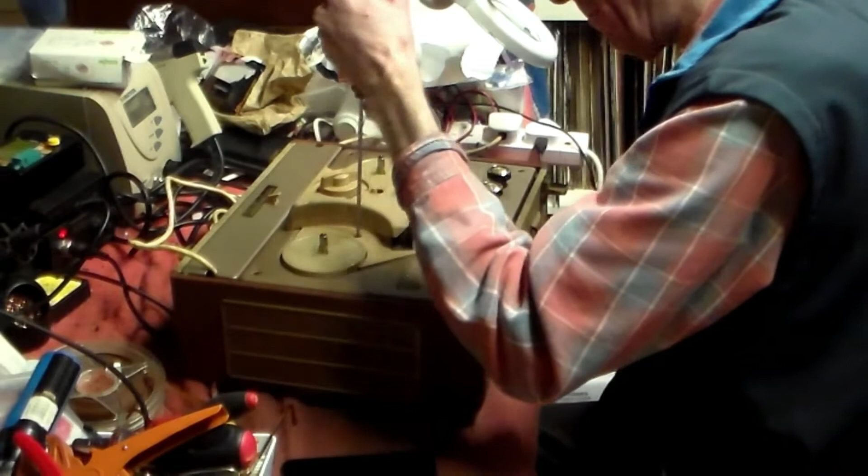You have to think very much about how to balance it. By balancing it, we mean the take-up reel and the supply reel have to be balanced correctly, and the reason why it doesn't rewind at all is because it's out of balance. That might affect the play as well, we don't know, but that does happen with these, so that's the first thing we look at.

So at some point this should come off. Very soon it should come off. Just help it on its way, as it were. We'll have a look under here.

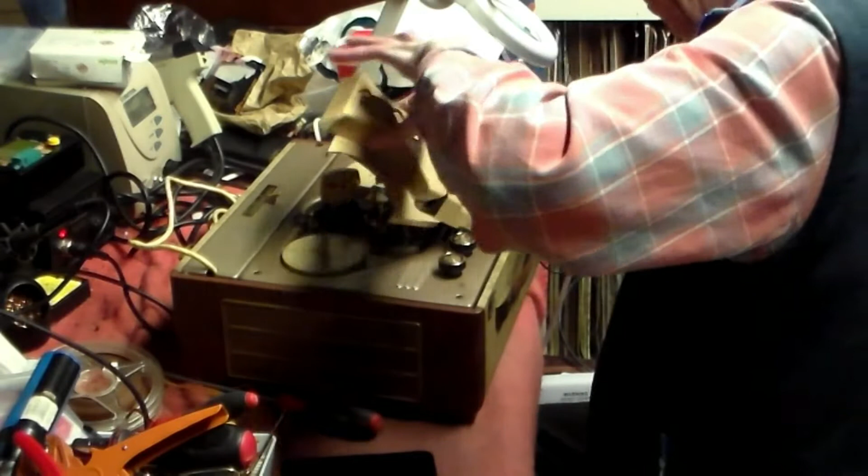Now the fact that it winds both ways straight away suggests to me that both the belts are okay on this deck, which is good to know, because on these decks they can be rather difficult to change. One is easy to change, one most certainly is not, and guess which one tends to fail?

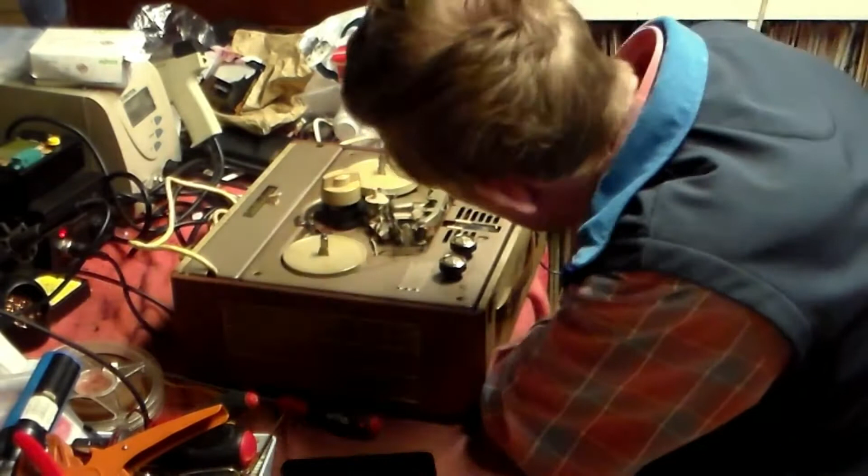Exactly that one. So on here we've got the eraser, the playback recorder, that's the playback thing there, and the capstan is there, and where's the capstan? Capstan, where's the capstan? There's no capstan on this thing.

Well, straight away I found a problem, because of course it should have a capstan wheel, which it's not. So we've got that to look up and find one for it. And also, by the way, that proves that the HT is there, and that proves that the amplifier works.

So before we go any further, I know what, oh, it's there, the capstan, right, so that should go forward, and it should, which is not done, so there's something with the mechanism here which we need to sort. Yeah, that's the capstan there. It's dirty but feels reasonably okay.

So the first thing we do is get the deck working, and then inside we go to look more closely at the electronics. So on we go, as it were, to see what is not doing what it should.

With these, by the way, the ST451, they have some interesting features such as the mic input as well, which goes out to the speaker, which I'll show you later on. This, by the way, was found in a lady's passage. It's actually leaving this out for dustman, surprisingly, but Chris brought it here, and me being me, we want to get this thing working, which is what we're going to do.

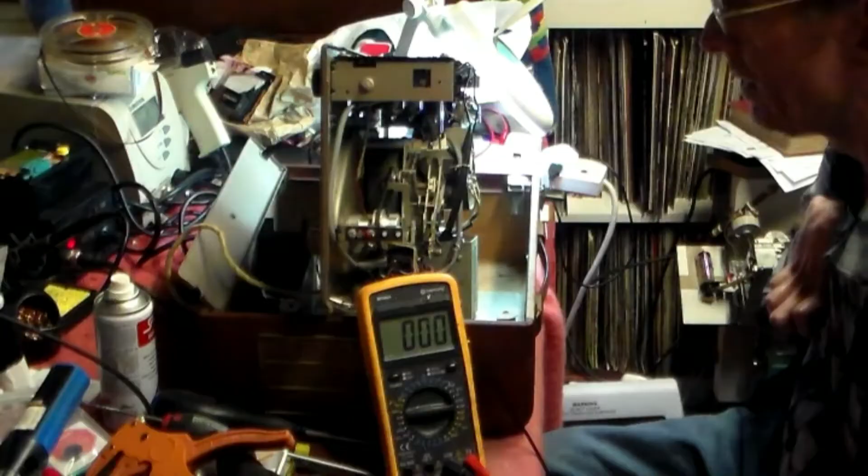Right, well, with this machine fully apart here, as you can see, one or two things come to light. First of all, this belt on the rewind is its total mechanism to get it going, as you can see if I set it going like that. Got an amount of torque, but it's not actually doing enough to rewind the tape when the tape is played.

So I'm going to change that belt. It's got to be a belt that's big enough to get onto this wheel here, because it picks up from there and goes to there. So that belt has to be a big one. I'll look online and see if I can find one that'll do it. If not, well, I'll have to find another way of doing it.

I noticed there is more play on this, so a smaller belt might be alright. I'll check and see on that by looking on another machine I've got where I did change the belts 3 or 4 years ago.

Also, by the way, with any machine like this, the other thing you need to be sure of, very sure of, is certain capacitors, grid caps in particular. Now, if it's switched on, wait for it to warm up. First of all, the EL3527, by the way, on this, the two stages are used in separate circuits.

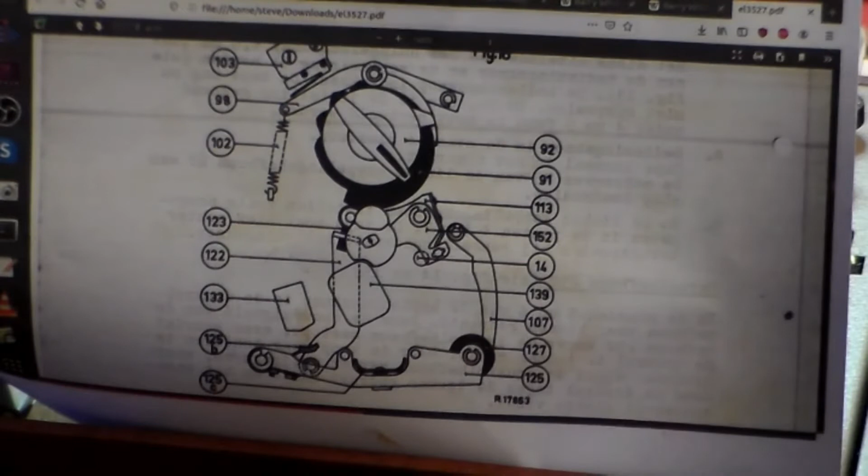Looking around YouTube, by the way, I found out that this deck is not really covered at all. So what I'll do - there's a fault here on this deck which I'm going to fix, but before I do, I thought I'd go through and show you what the fault was on this thing.

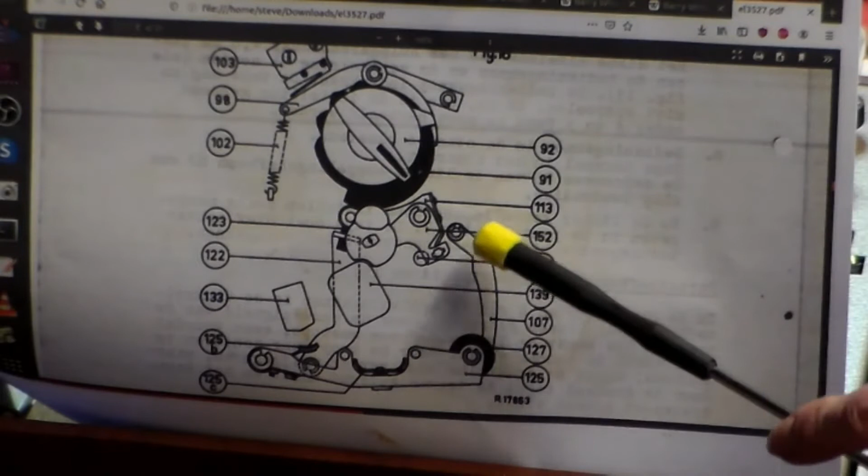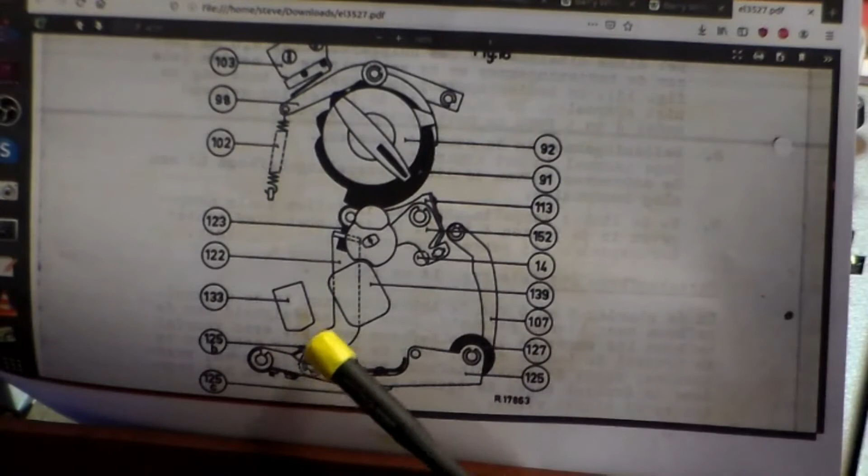That's the switch there that operates it, you know, and the cam there, which means that basically what happens is it controls how far away from the idler this capstan is, using this here, through parts number 1, 2, 3 and 1, 1, 3, which is there, linked to that post there. That, by the way, is the capstan wheel there, and those are the pressure pads for the heads on the same thing.

And also, although it's not shown on there, there is also a spring which makes it spring forward, and that which puts it back. So the whole thing is, in theory, the right way about. Now if we go back a bit, this is upside down actually, but here again, this is switch to play, and that there is this. This bit here is there, like that, and that there, at the top there, like this.

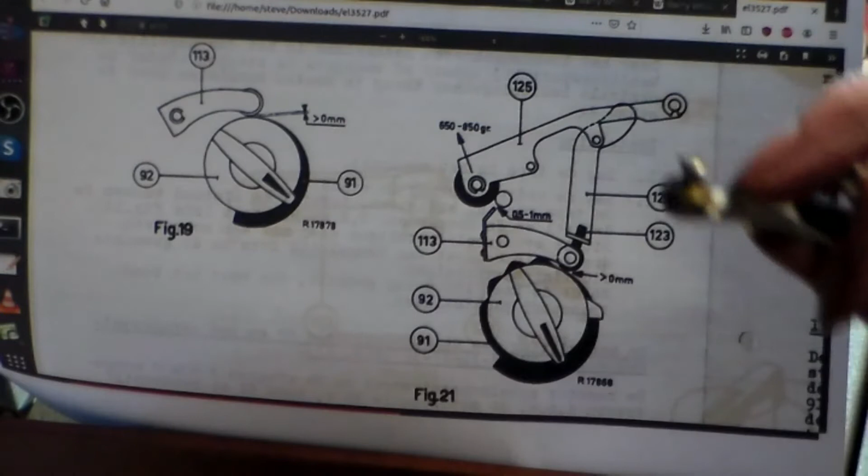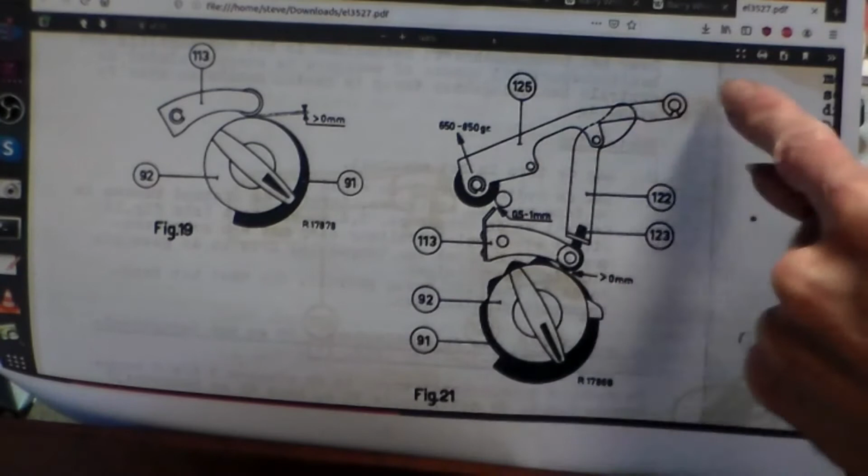So you can see there, at the bottom, a clip which is bent out of shape - that's what the problem is. That's screwed to the bottom of this, which is the capstan wheel. So the whole thing is held together in that way.

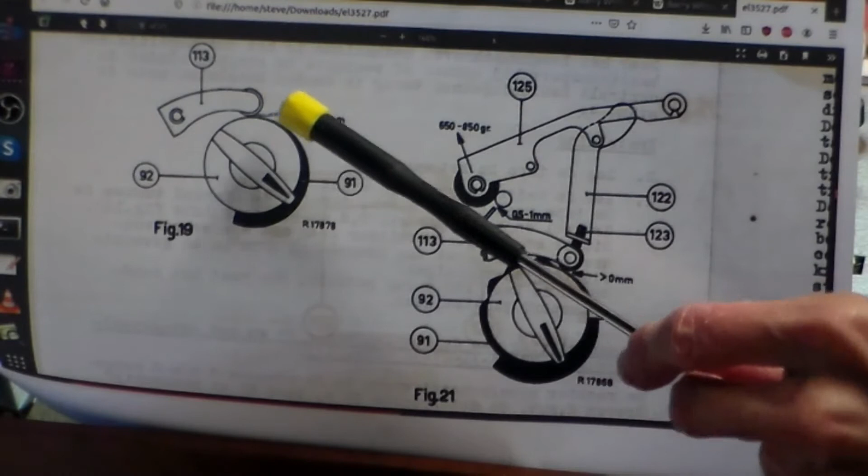Here you see cap 113, and of course 1, 2, 3 is the head thing which goes on it, which holds against it. So the whole lot is held in stasis, as it were, and it's held by the cam you see there and there.

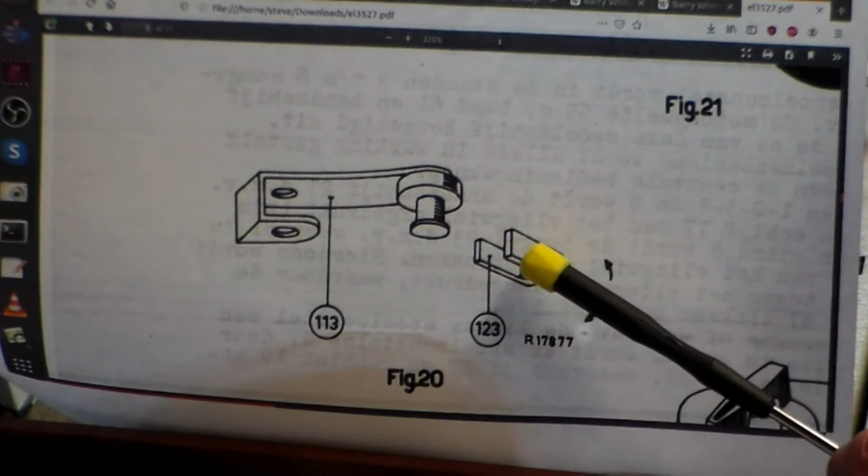The problem with this set - give me a minute, there we are. The problem is this bit here, 1, 2, 3, which is out of position quite badly. So that needs to be put back in position and bent back into shape to go into here, like that. You see? So that's what the problem is with it.

Also with this deck, by the way, the belts underneath are okay, but I will change them, and also the balancing is done under the reel table, so I'll look at that as well. But that is basically how it works with this unit.

So let's get to it and let's have a look at what the problem is and what to do.

I've not seen this problem on these sets before, but all this stuff is getting old now.

By the way, all the notes for this deck came on the service data for the Philips EL3527, which is the same as the Stellaphone ST451. Stellaphone and Philips by this time were the same unit, and the Stellaphone one is more popular. Now, this circuit diagram - I can read it okay, but the rest is in German, or Dutch, I'm not sure which, but there you go.

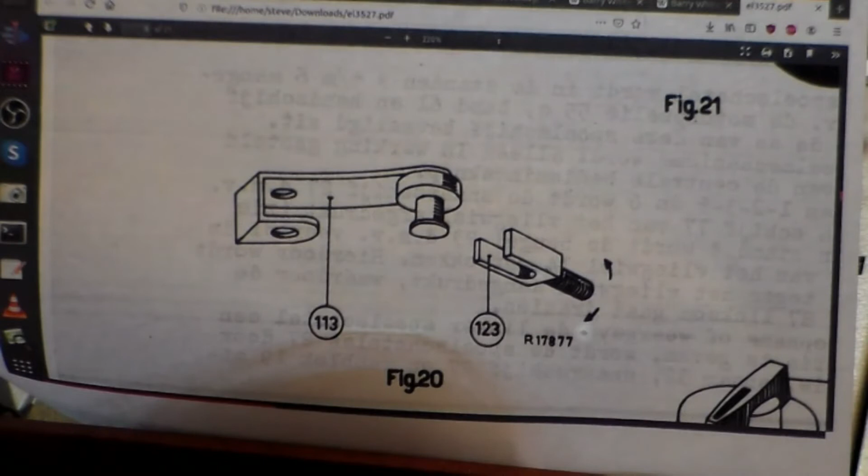Anyway, that's the problem, and if we can get a look at the unit here - you see, it's here, and that goes up like that, and that should push it back, like I said the other day, but it doesn't as of yet, but it will do at some point very soon, and so that's the problem. So let's go have a look and let's see if we can put it right, shall we?

It's quite simple. Right, well at this stage now, I think I've got this bit here correct as far as I can tell, but it jumps into playback or record too early. If I put it in power-on mode - that's fast forward, that's okay, and that should be rewind, but as you can see here, it's gone up there, because that has gone all the way where it shouldn't do.

So therefore, I think that this cam and this switch need to be looked at. It's not too different, I don't think, from the cams in a gearbox, but when things like cams get out of shape, things do happen.

So again, that's off, that's play, that's on, but nothing happening. That's rewind, so that's switch forward. That's rewind, as you can see at that point now. You see that is now engaged. It shouldn't be, and that will not go any further because of these here behind.

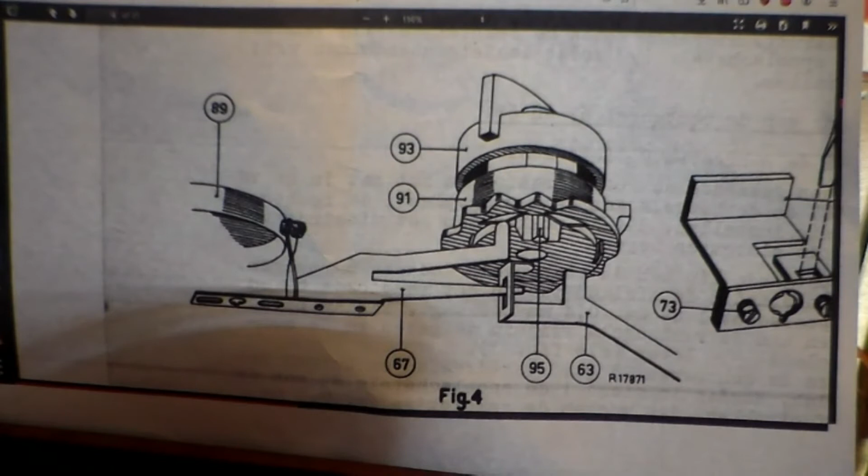This is the switch, of course, that does everything, and in this case, if anyone fooled themselves, it was me, because there's nothing wrong with this switch. Everything is in order on this. The cam is there, you see, and everything else, just like the switch, and the switch is fine. It switches the spindles in and out, of course, and everything else. The cam is fine, but that is basically how the cam works.

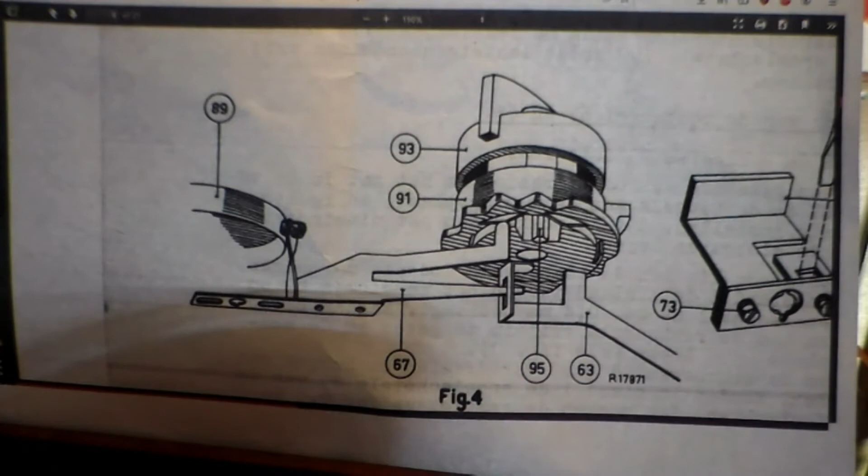The problem is with the switch, like before - I'll show you more of it in a minute. What happens is that this switch should have something on it to hold it out of the way until it's actually wanted, and then it goes in. So I'm going to put some rubber on the switch to make it that bit longer, to hold this away from the cam, and that will make it work properly, I hope. Let's see, shall we? Let's find out.

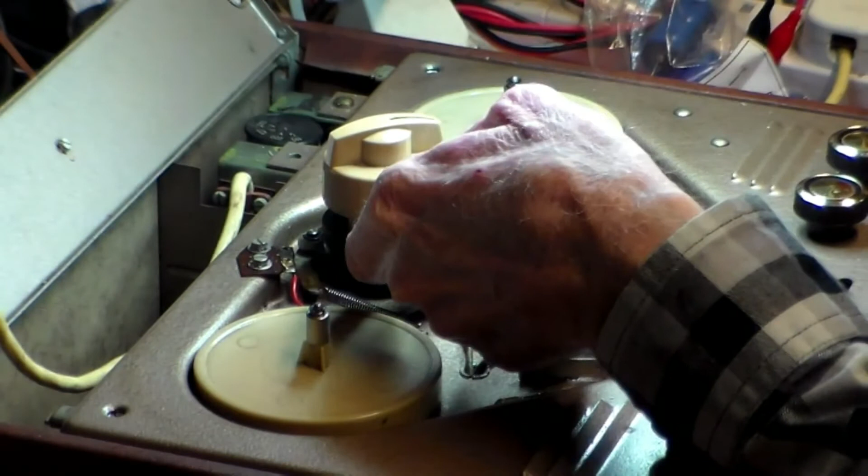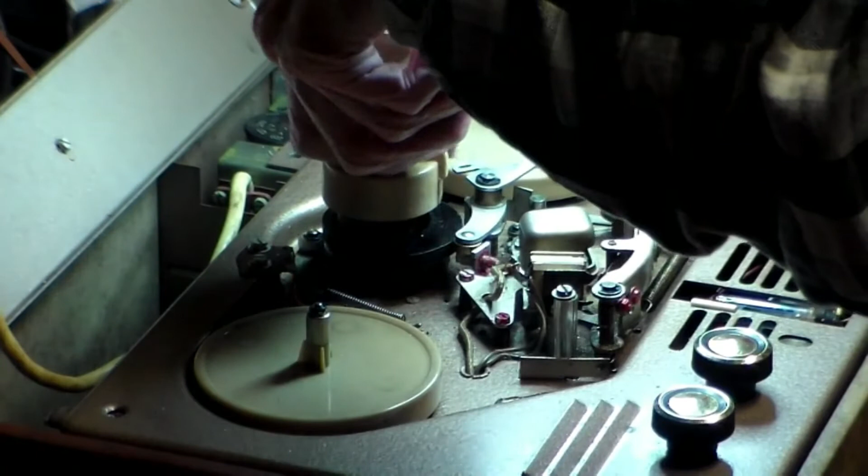Well, people, I am officially an idiot. The problem was not solved by putting a bit of rubber on anything at all. The problem was that it was not seating into there properly - it was being driven by the surround rather than the driver itself. So with it in place now, 1, 2, and now there you are, 3, and back again. You see? So that is now all right.

Now the next problem we have with this is the winds. On this machine, what happens is you go there, you see, on fast wind, do that - it does have some tension, but not enough. Now go to your side now - again, same applies. Now with this deck, you push the knob down and it winds.

Oh, misses. So underneath these, which come off with the clip on top here, there are the little washers and things, and they come loose or they break. So now I've got to balance these two up, and that should be enough to make it wind properly.

Then after that, of course, does it play, does it record? If so, it's done - give it a clean, Bob's your auntie, or Bob's your uncle, depending on your viewpoint. But yeah, I am an idiot. Everyone does it, and this time it's my turn. So yes, I'm an idiot, I admit it.

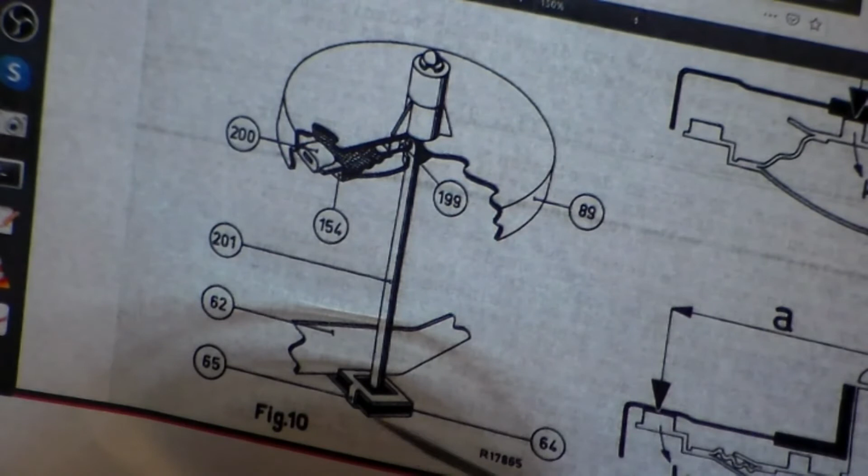This here is a diagram of the mechanism of both the spindles. Underneath there's that which pulls the thing down to make it go, driven by the drive belt, down there. And up here, underneath the spindle, there's another wheel that holds onto it, and two of these little rubber washers here, and they go faulty and fail. So the next thing we do is check those, because if they fail, you get the sort of effects that we have here.

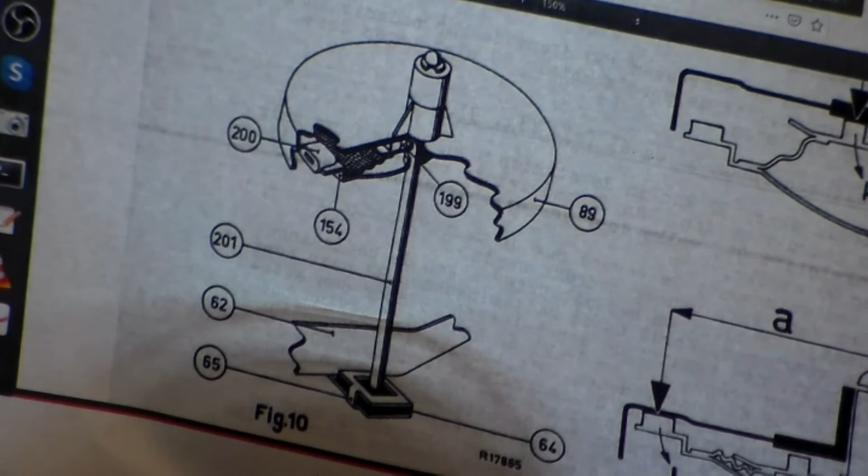Now there's no point showing you how to put a belt on camera, because we all know that, and I haven't got a belt for this right now, but I will, and it goes on the side of the deck, which is accessible, because there's two parts of this deck. One side is accessible and one isn't, and normally it's the inaccessible side that fails, but this one fortunately is the accessible side.